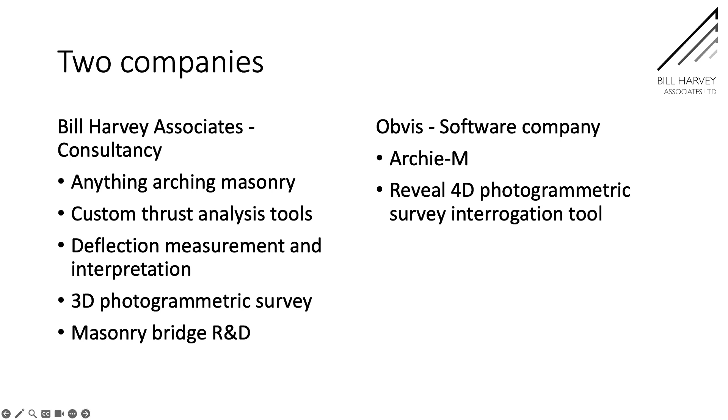Andrew has said that. I just want to say, obviously the audience, I wasn't entirely sure what to expect. I am expecting there to be quite a wide mix. I have explicitly not aimed to teach anything to the established history group, who have quite a good grasp of a lot of this. But I hope there is in the audience some number of engineers working with or interested in masonry, but who aren't familiar with all the background. And that's really the core audience that I'm addressing. And there may be some non-engineers, in which case I hope there's enough non-technical content and photographs and interesting bits and pieces to keep that interest.

Understanding is quite a strong word. Question is, how much do we really understand about bridges, as Andrew was saying? And what does that actually mean? Does it mean we've got tools that let us pour the numbers in and get an answer out? Or does it mean that by some mix of reasoning and calculation, we can achieve the confidence to build, the confidence not to build, the confidence to leave it as it is, the confidence to intervene and decide what to do?

Before we get on to theory, it's sort of obvious, but it's worth saying that an awful lot of bridges were built without anything like modern theory. And true arches, even quite sizable arches, are really very old.

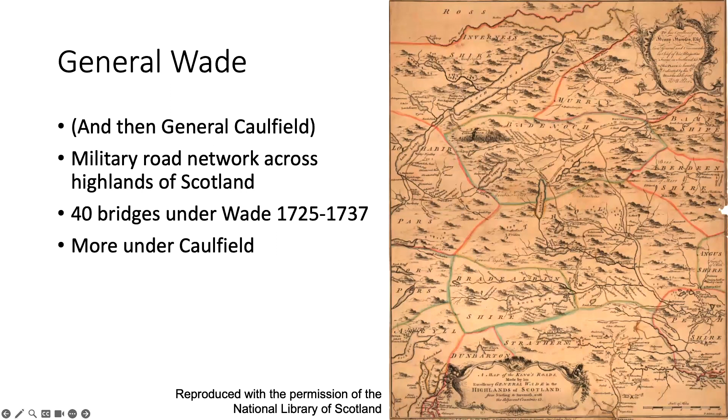Even in the mid-1700s, William Edwards made audacious attempts to cross the River Taff. His first attempt was a 3-span bridge, much like the one behind, or perhaps 3 or 4 spans, no longer known exactly, and it was washed away by a flood. But he'd been given a design, build, finance, operate contract to provide a crossing for 7 years, so he thought, well, sod that, I'm going to cross it in one span.

His first single-span effort, the second attempt overall, saw the centering collapse before the bridge was complete. The centering had been built - I should say Edwards was a country wall builder and house builder - by his friend the wheelwright. It's just a big wheel. That collapsed for reasons we're not entirely sure about, maybe another flood, maybe just inadequate design.

The third attempt, the second single span, saw the centering survive and be struck. The bridge was completed, stayed up for a few weeks, and then failed by the crown bursting upwards. At that point Edwards was bankrupt, unsurprisingly. Fortunately, he was also the local minister, and the gentry had a whip round to put him back on his feet.

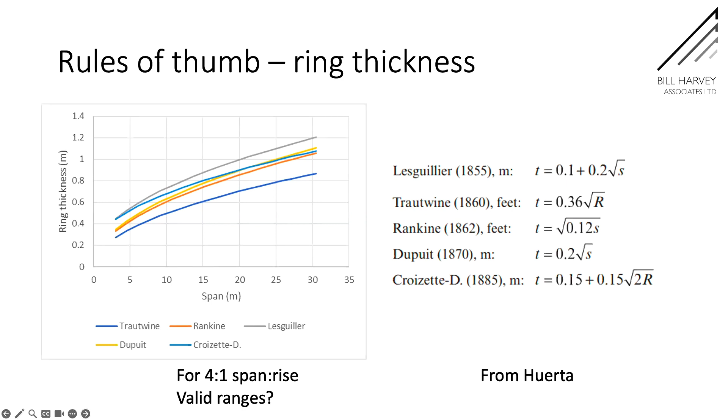That tends to come in more with buttressing for vaults where you don't necessarily have soil behind. So the soil changes things there quite a lot.

Okay, so moving on to the development of theory - it's worth saying I haven't really gone to primary sources very much, partly because French is a language I never learned, and almost all theory happened in France.

I'm drawing heavily on Heyman, who we'll meet later, and Huerta.

In 1717, Gautier identifies 5 significant problems for the learned to resolve. 4 of those are related to masonry bridges. He wants to be able to establish abutment thickness, and pier thickness as a proportion of span for multi-span bridges.

How thick should the ring be at the crown? What shape should the arch be? And also, retaining wall dimensions.

That comes a little bit after Robert Hooke, who famously - and this is the bit almost everyone, I suspect, knows - published at the end of something else entirely, on helioscopes, an anagram with the letters sorted into alphabetical order for a Latin statement, which he claimed showed the true mathematical and mechanical form for all manner of arches for building: as hangs the flexible line, so but inverted stands a rigid arch.

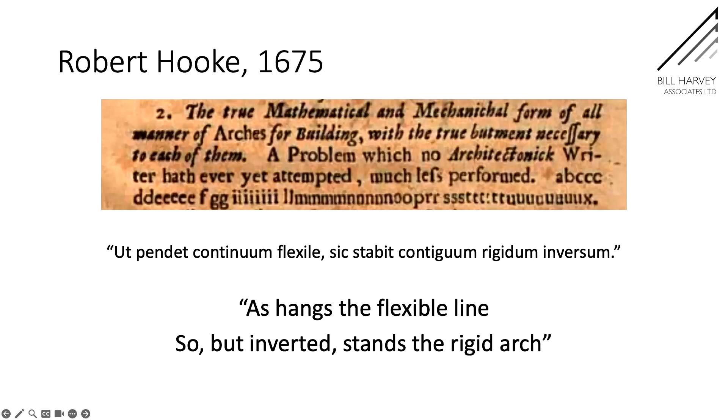That has been taken as a statement that the catenary is the shape of interest. So there's then a bit of pursuit of the mathematics of the catenary.

3 people found a solution, but none of them published a proof - everything was very close, with lots of competition, and people worried about maintaining proof that they'd got there first. In 1697, David Gregory published the whole thing, with some errors apparently, but with a correct result.

He introduces the concept of infinitely small and rigid polished spheres sitting and hanging in an arch. And already in 1697 he makes this statement: when an arch is of any other figure, any other shape than this perfect catenary, it's because in its thickness some catenary is included - a sort of early echo of what turns out to be one of the really fundamental bases of arch stability. So he's recognizing that it will stand if some valid thrust line is present within it.

But how relevant is the catenary really? Hooke didn't actually mention it.

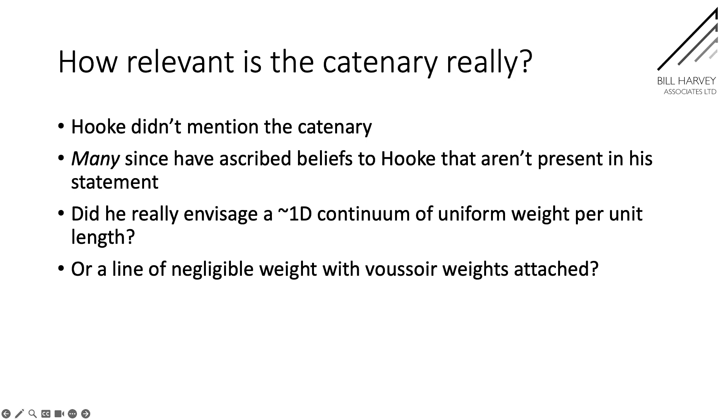Many have ascribed beliefs to Hooke that aren't actually present in that statement. Did he really envisage a 1D continuum with uniform weight per unit length? Or would he have been thinking of a line of negligible weight with heavy weights attached, as ultimately taken to a real extreme in practical application by Gaudi in three dimensions?

Then in 1695, Lahire - apologies for my French pronunciation - who in the process of his work on bridges invented a force polygon and a funicular polygon, which is essentially the line of thrust of an arch. He initially assumed frictionless joints, so zero friction between voussoirs, which means the force has to be exactly perpendicular to the joint at every point in the arch. It also means that if you take your arch right round - if you have a semicircular arch and your springings are horizontal - you obviously have a horizontal force coming through from the arch, so you need an infinite vertical load to stop sliding in the absence of friction.

He came back to it in 1712 and took completely the opposite approach, saying you can assume friction is enough that there will not be any sliding. His object was to find the thrust on the abutment. And this is the first introduction of the idea, in mathematical terms anyway, of the arch breaking at a particular point on the curve.

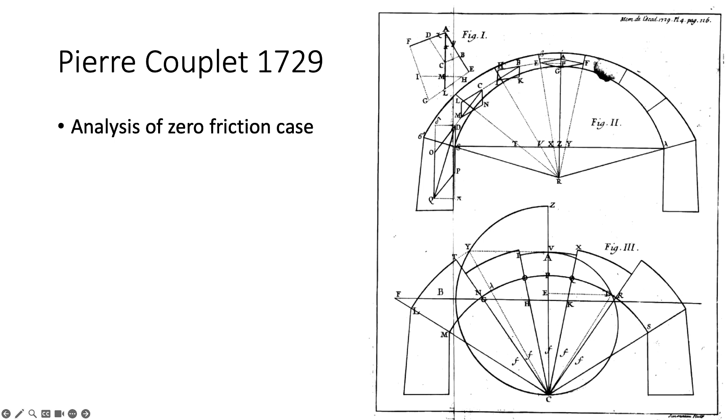And again, he comes back to it a bit later with a different approach. He states his assumptions: friction stops sliding, and there's no resistance to cracks opening, so no tensile stress in the joints. There's also an unstated assumption that the stone won't crush.

One of the things he looks at is the case of a weightless arch with a single central load. And he correctly establishes that it will be stable as long as the straight lines from the load point to the extrados at the springing stay within the masonry.

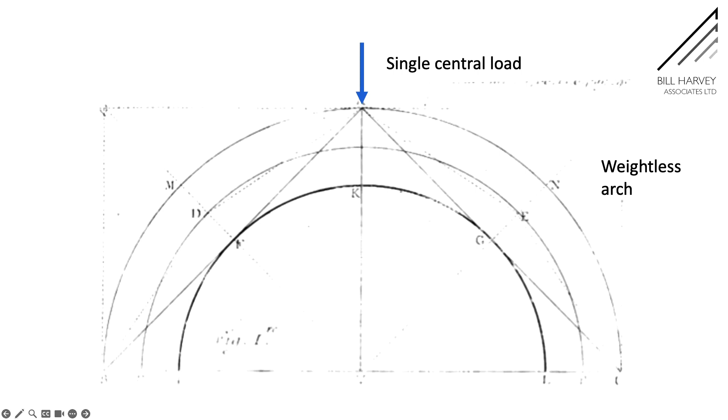He then goes on to look at the minimum thickness for stability under the self-weight of the arch. Here he assumes a hinge at 45 degrees, but correctly works out the maths for the thickness. So the minimum thickness he comes up with is a little bit less than the true minimum, because the true hinge position isn't quite at 45 degrees - but the sensitivity to that position isn't very high, so the error isn't very big.

Then he goes on to look at abutment thrust and stability. Here he assumes that the thrust functions at the midpoint at both the crown and the springing, and we calculate the horizontal thrust.

I'm going to come back in a bit to the whole business of experiments and models, but this particular set are quite important because they influence the development of theory.

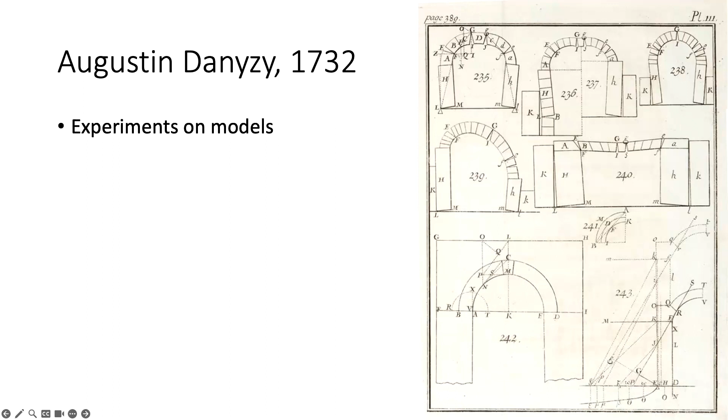He again identified that friction is often large enough to preclude sliding. He assumed that tension in joints can be neglected. And he recognized - this is Couplet's diagram again - that this angle can't be assumed to be 45 degrees; you actually have to search for the worst case.

And he identified that if an arch is stable, then the thrust must lie between some limits, and those limits can be calculated.

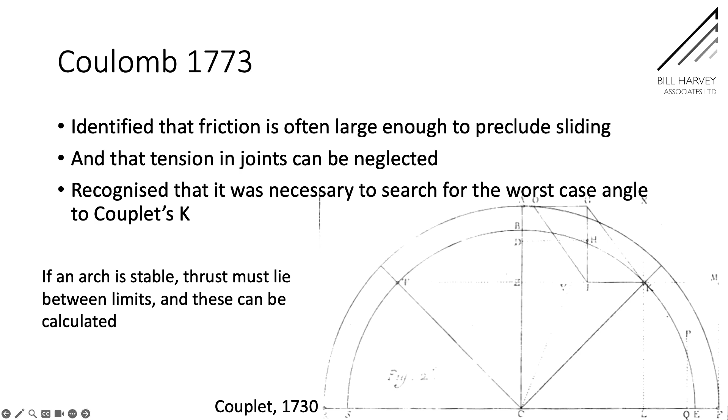I'm jumping now a bit.

Thomas Young wrote an article for the supplement to the Britannica about bridges, and he includes in it the calculation of a line of thrust in the direction of curve of equilibrium for Waterloo Bridge. You note that it follows the center. He's fixing it at the center again at two positions, but it does show that it follows the curve well.

At this point, we start sort of going backwards and forwards. So prior to this, all of that theoretical work was essentially theoretical. Bridges were being built by rules of thumb, trial and error, sometimes physical models. Now we start getting the interesting interaction, and the questions arise of what the particular engineer knew at the point that they were

designing a given bridge. John Rennie, New London Bridge, 150-foot span, how much calculation was involved in this? We don't know the answer to that question.

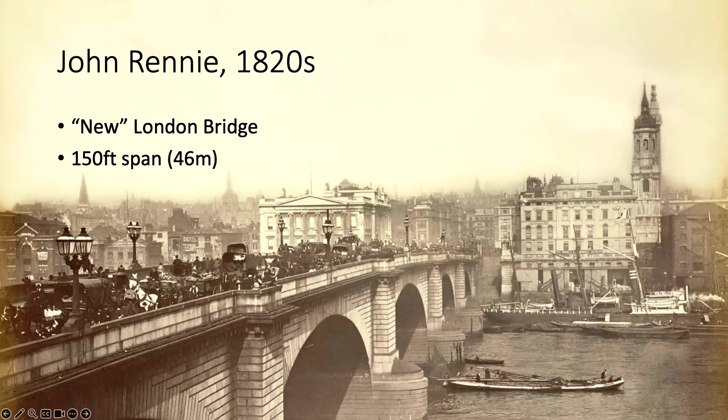Telford's bridge at Over. Telford had a lot of troubles with this, but that was all to do with the fact that the assumptions about the foundation were wrong. He assumed much sounder foundations than were actually present. Again, there's no record that I know of what calculations were done for the stability of the arch itself.

Now we have Navier, whose main contribution is elastic analysis, but in the earlier editions of his teaching, his course notes for the École, covers arch theory. And he inverts what Coulomb said and states the modern understanding that if the thrust lies between the limits, then the arch is stable. So if you can find one line of thrust that fits within the masonry, then the bridge will be safe.

Grosvenor Bridge in Chester, it's George Rennie. His brother, as ICE president in 1846, credited George with doing the analysis for the bridge, equilibrating the bridge, and designing the centering. It's interesting that the latter is contested. The Trubshaw, a dependent of the contractor in building the bridge, presented a paper in which he makes a rather firm claim that the centering was both designed and constructed by his staff.

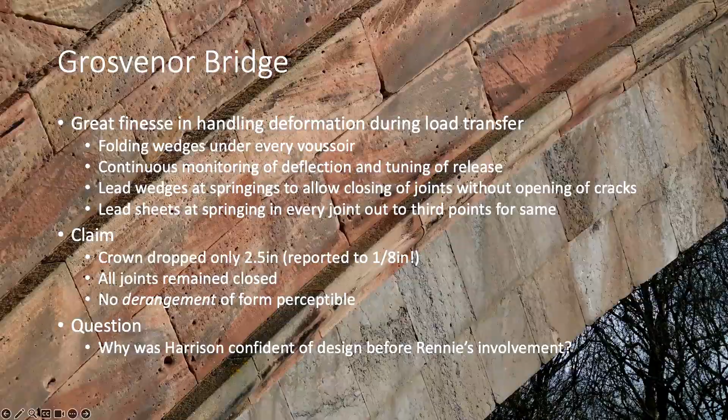So then we get to lines of thrust actually as understood now, which were independently discovered, developed, if you like, by Méry in France and Moseley. It's still known as the méthode de Méry in French. Huerta says that Moseley's was the first precise definition of the line of thrust. I'm not exactly sure what that precision is.

He was one of few British contributors who'd read all of the French work, up to but not including Méry. And he explicitly linked his thrust line with Coulomb's theory of collapse. And he didn't do any experimental work himself, but he referred to lots of work done by others. This period is very interesting because these questions arise of who knows what.

Brunel is very clearly calculating thrust by 1837. There's an interesting bit of subdivision of this mass of masonry over the pier going on. It's not quite clear what's happening there, and the lines drawn connecting two points on the upper part of this block to one point on the bottom don't make any real sense from a thrust point of view. But there's a clear procedure, and there's actually a design procedure visible in his notes about how you get from your starting point to a sound design.

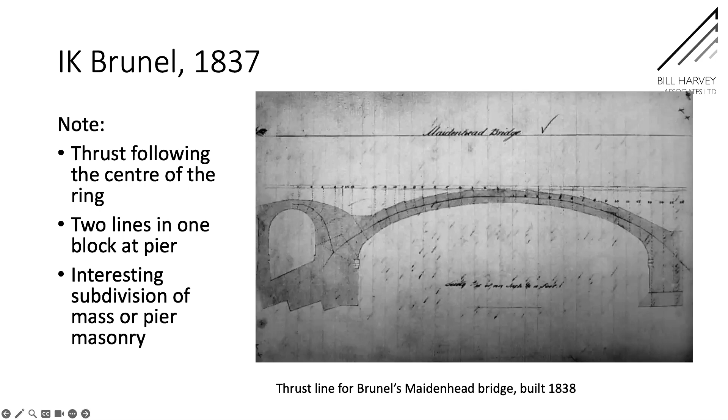And again, Maidenhead had some difficulty, but it wasn't to do with arch stability. It was more likely due to some combination of striking the center before the Roman cement had gone off, and some foundation issues.

There's no indication of his thinking about soil structure interaction and how the thrust and the movement in the foundations works. There's a record from an article by Owen that he instructed his assistant, quite late though, that all forces should pass exactly through the center of any surfaces of resistance, especially in anything resembling a column or strut. Owen suggests that an arch might be seen as resembling a column or strut, which is fair enough, but of course, he wasn't building arch bridges by 1854.

So we've got the state of play in the 1840s. Basic assumptions established: infinite compressive strength, no tensile strength, failure by hinging. We've got a line of thrust, a very mathematical presentation by Moseley, and the implications, exactly what the indeterminacy means. This line of thrust could be in lots of different positions. What are the implications of that? Not necessarily clear, and this is where Barlow comes in.

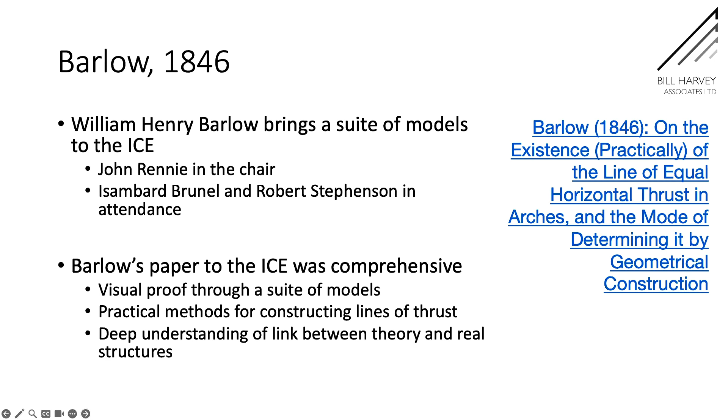And this, interestingly, doesn't particularly feature in Heyman's presentation, but seems to me to be absolutely central. Barlow comes along to the ICE with a suite of physical models. John Rennie's in the chair, Brunel and Stephenson both in the audience. And the paper is comprehensive. So there's a visual proof through a suite of models, practical methods of actually constructing lines of thrust, and a deep understanding of the link between theory and real structures.

Both the paper and the discussion are well worth reading. The discussion is hilarious. Mr. Bidder was tempted to consider an arch constructed of rectangular bricks set in a matrix of cement as a bent truss girder, the tension rods of which were represented by the abutments of the arch. Very flat arches, such as Maidenhead, were examples of what he meant.

Mr. Brunel could not agree with Mr. Bidder's comparison, or what he might be permitted to term his amusing theory. The dripping condescension. Mr. Bidder was right, I think. It's not an unreasonable analogy.

So Barlow has this sort of mostly graphical - there's a bit of calculation and there's the ratio of these lines - but a mostly graphical method for constructing lines of thrust.

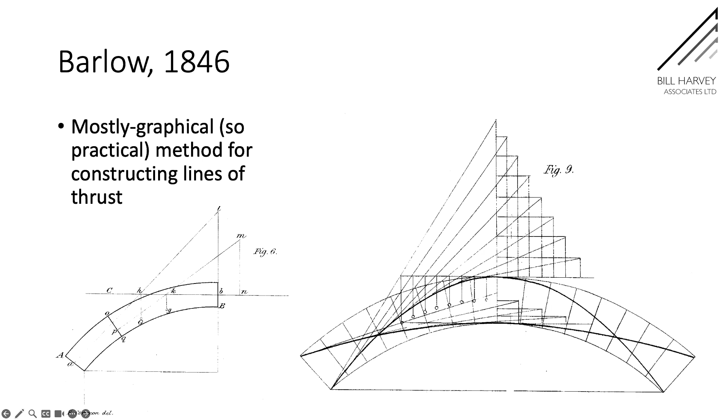But the most significant thing is all the discussion of what it actually means. So he identifies that the maximum horizontal thrust is the resistance that the arch can give if the abutments push, and the minimum is the force that can be exerted by the arch on the abutments. And that's the first time that has really been explicitly drawn out.

He identifies that if you've got arches meeting at a pier, the different geometries, then the relationship between these maximum and minimum are really important. Your minimum at one and the maximum at the other become relevant.

He identifies that just because your masonry is built to a particular springing point doesn't mean that that's the structural springing point. And draws attention to the complexity of real structures in comparison to a 2D arch.

After that, there's multiple rediscoveries, lots of discussion. What becomes known in more recent times as the safe theorem gets into standard text, and people start using it as a routine thing, just accepting that if we can draw a line of thrust within the masonry, then it's sound. And graphic statics, these lines of thrust and the funicular polygon get refined into a much more comprehensive system.

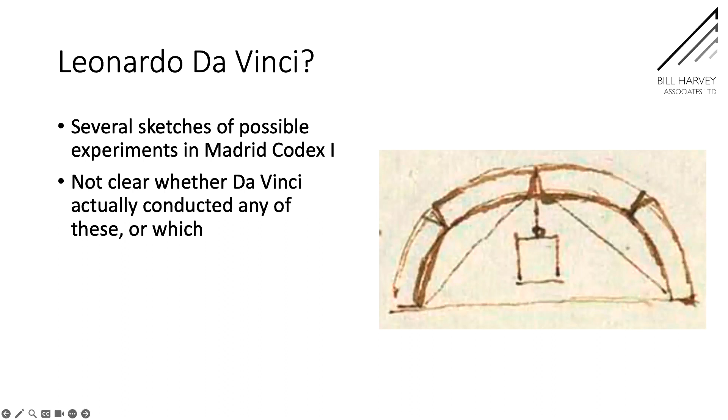We've got the effect of an extra trip load in the collapse mode.

Hooke was an experimentalist. He was curator of experiments for the Royal Society, and there's the documentation of interactions where he was repeatedly promising experiments to prove his theory. Unfortunately, there's no record of the experiments that were done.

I note Bill wrote a New Scientist article many years ago, in which he makes specific claims about what those experiments included. I think he did that. But he was a practicing engineering experimentalist, and he certainly would have been thinking about finite pieces and interactions.

Gautier in 1717 built timber voussoirs in a semicircular arch. He built this half arch setup with blocks on the back and took these off one by one, determining that it collapsed when he got to point 11. If you do the calculations, it should be fine without them at all. So he obviously encountered the problem of physical experiments: if your model isn't perfect, the results aren't either.

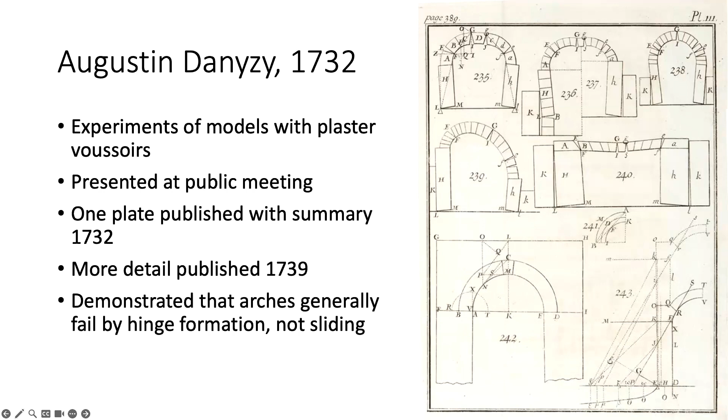There was much concern about the dome of St. Peter's in 1748, and as a result, physical hanging chain models were built as part of the process of proving that it is safe, and also of estimating suitable forces to base the design of a hoop at the bottom on.

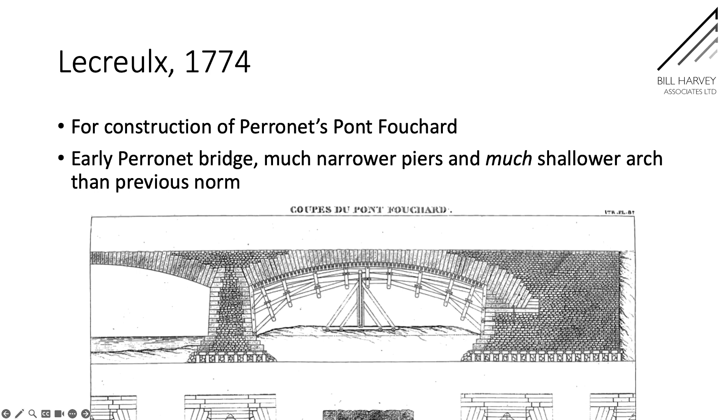In 1774, we've now got Perronet starting to produce very long span, low rise bridges with much higher abutment thrust. His contractor built a series of models for one of his early bridges, and he interestingly identified that sliding failure in the abutment was a real risk for those under dead load.

Another set of experiments in 1810 - there was nothing particularly new in Boistard's experiment, but they were sufficient to convince engineers at that point that the no-friction model was wrong.

Rondelet claims to have made an infinity of experiments using 54 models of vaults of different forms and extrados - probably the largest set that has ever been made and that ever will be made. But he was trying to produce new rules of thumb. So he was doing experiments, producing data, and then trying to fit a new rule of thumb to it - the old approach, just based on his experiments rather than on observation of previous successes.

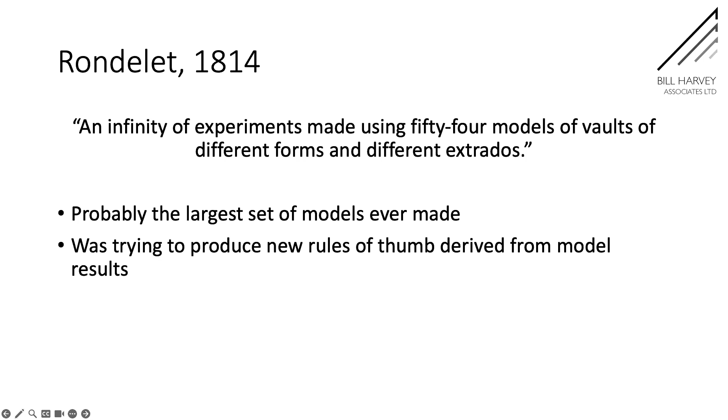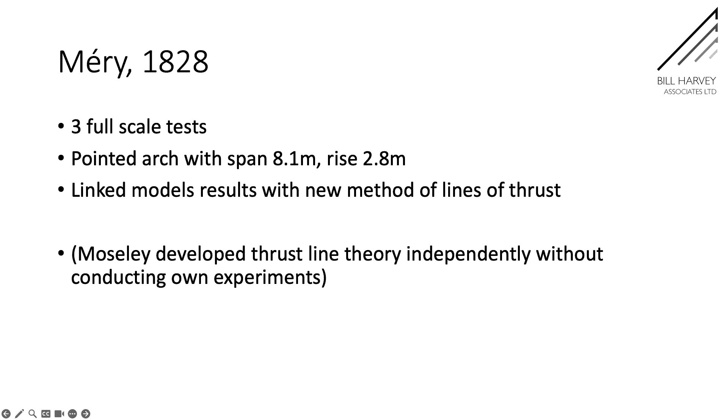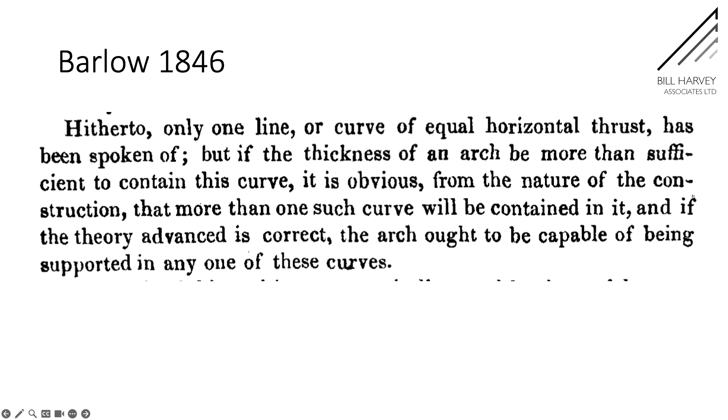He did his own experiments as well, quite large span. And Barlow, of course, the whole thing about Barlow's paper was that it involved all these physical models. So he introduced the wobbly arch, which becomes a stock in trade of the educator, beautifully showing how, as you load the top, although the arch goes down, it goes up - that interaction between thrust and deflection. Just as an aside, Fleeming Jenkin illustrates in his article models very much on the same basis.

But the key observation is this model: 6 voussoirs with wooden slips between, each with 4 pieces of timber. So you can take them out in any combination and show one by one that the different thrust lines all work.

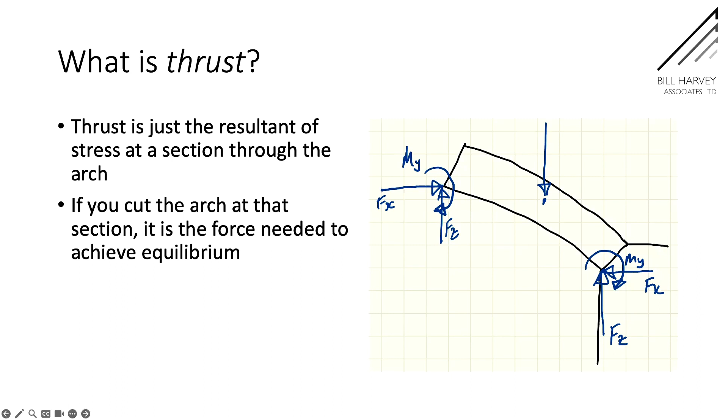Quick technical bit, just in case it's not familiar. Thrust itself is just the resultant of stress at some slice through the arch - the force you need to maintain equilibrium if you cut the arch there. If you rotate the axes of these forces so that they're normal and parallel to the cut, then you've got a shear working along - and this is the thing that we're saying will never be enough to induce sliding - and we've got a normal force. Divide the moment by the normal force and you get an offset, which is where that resultant acts. Thrust is simply the locus of points as you do that for every section, for lots of sections around the arch.

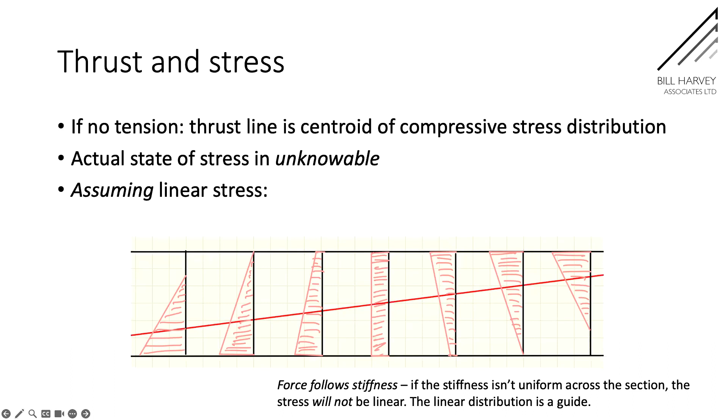Relating to stress, if there's no tension, then the thrust is the centroid of a compressive stress distribution. The actual stress is unknowable, but if you assume linear stress, it gives you some idea of what's going on. This picture at the bottom shows a line of thrust running from outside the third point at one side to outside the third point at the other, and you can see how the stress varies. Where the stress goes to zero, a crack opens. If the stress balances, then they close again.

If that line of thrust gets to the very edge, it means the stress is infinite. So if the line of thrust is at or beyond the edge, that's an impossible state.

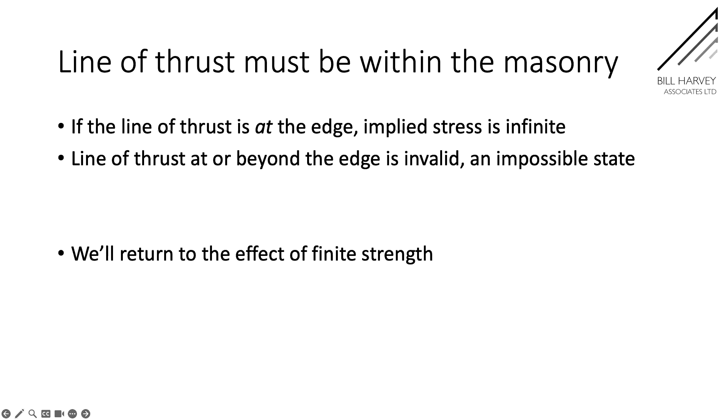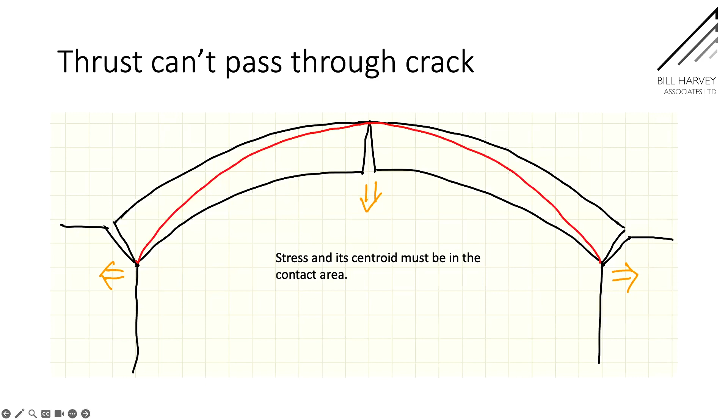If the abutments push in, the arch will squeeze up, and again the thrust has to go through the points of contact, so it has to be much flatter. Those are exactly Barlow's limiting lines.

Is that a meaningful state? Sure. Both abutments tilt the same way—that's exactly what you get.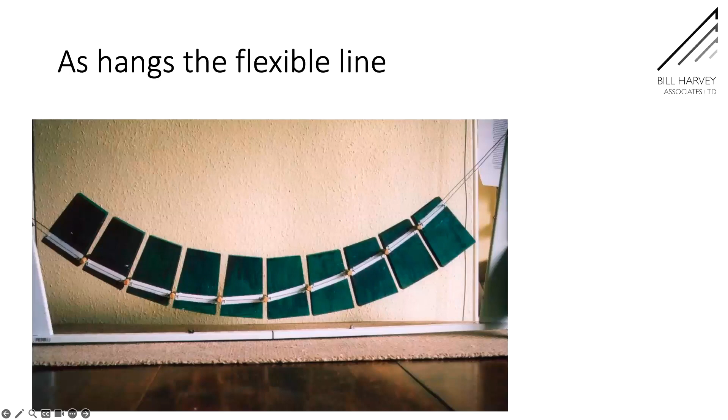And that model has a pair showing Hooke's observation. It works perfectly well, and even in this—this is an inverted photo of a suspended form. The voussoirs take up the right angle.

So the calculation is easy if we have three hinges—it's all simple statics. In two cases, your vertical offset is lower, your horizontal offset is bigger, so the horizontal component of thrust increases.

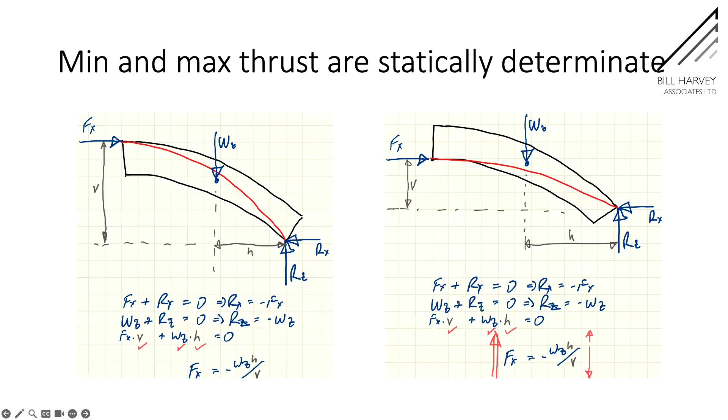In between, we've got no way of knowing where the thrust acts on the crown and springing in a particular case. But if we choose values for the unknowns, we can calculate the implied thrust from that. That's exactly what Young was doing—they were saying we're going to fix the thrust at the crown in the middle, and somewhere down here in the middle, and try to find a form for the bridge which keeps it near the middle through the whole thing. Brunel was doing it as a design; Young was doing it as a test of an existing bridge.

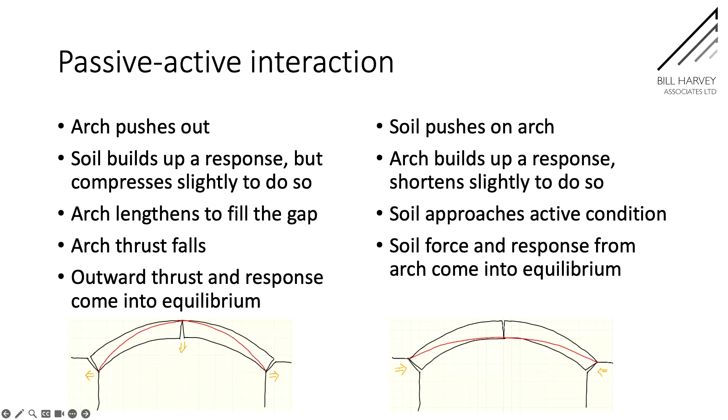In terms of understanding how arches behave in situ, the passive-active interaction is really absolutely fundamental. The arch has a passive-active behavior in the same way as the soil. If you push on soil, it pushes back harder; if you move away, it pushes less hard. The arch does the opposite, and so they can find equilibrium. But they have to find equilibrium, and finding it involves movement—small movements, but significant movements.

If you find that the minimum and maximum don't work out together—if the minimum arch thrust is greater than the maximum available soil pressure, the arch will keep dropping. It's not particularly common, but it does happen. And if the minimum soil pressure is greater than the maximum arch thrust, then the arch will burst upwards. That, again, is rare, but it does happen.

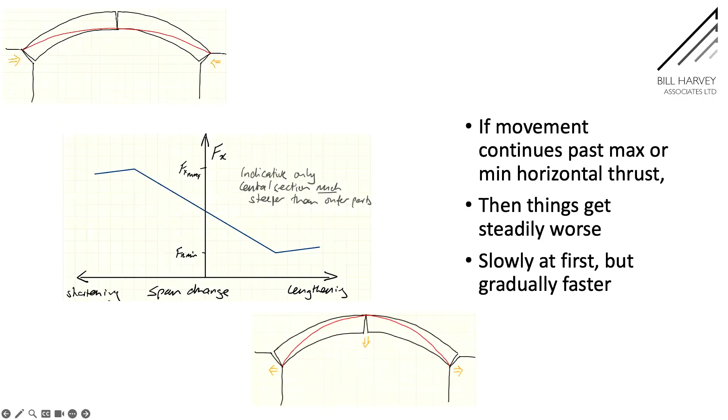I'll skip through those.

The medieval tradition had been that the mason's secrets were rules of proportion—thickness of abutment relative to the span of the arch, and things like that. They were expected to work at any scale: you can build a model this big, or a cathedral, and the same rules work. Strength of material just doesn't feature. And interestingly, arch theory, as developed through to Culmann and Barlow, also doesn't mention that theory.

Galileo challenged that, laid the foundation for strength of materials, introduced the square-cube law, and observed that if you double the length, your weight has gone up with the cube, but the available capacity has only gone up with the square.

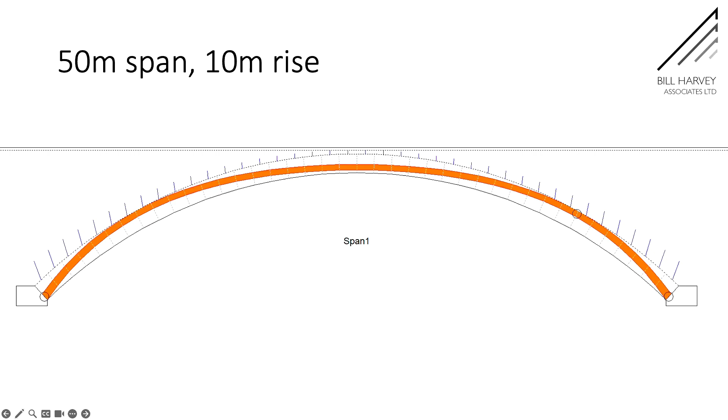Just looking at some pictures from our Archie software, doubling every dimension as we go, but not the material. The thickness of this line shows how much material is needed to sustain the load, and you can see that thickness increasing. The general shape of the thrust isn't changing much, but as we double and double and double, eventually it doesn't fit at all.

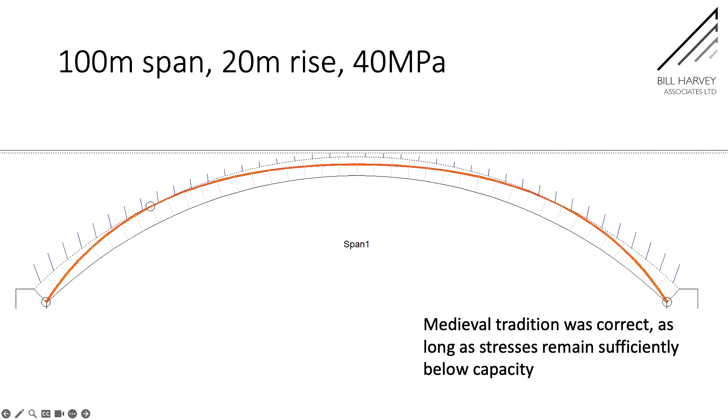You're unlikely to build a 100-meter span bridge with a 5 megapascal brick. If we double the strength as well, then you can really see there's absolutely no change in the form of the thrust. So as long as we are a long way from capacity, the medieval rules work fine.

They introduced the ability to resolve indeterminacy by introducing elastic properties. He defined the job of the structural engineer as calculating unique internal forces, deriving the internal stresses, and comparing those with material strength, which Heyman soon called Navier's straitjacket.

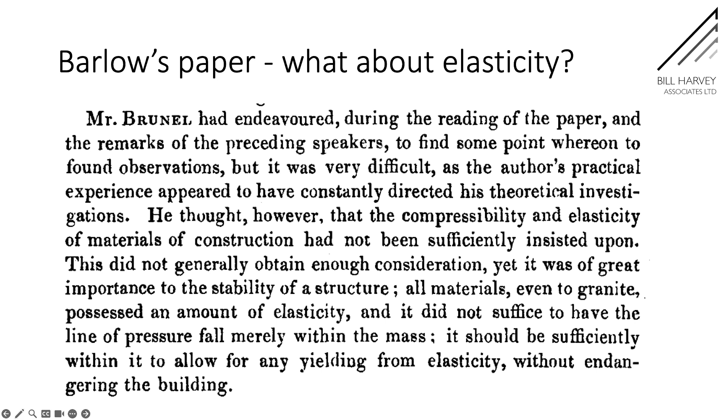Barlow's paper: Brunel in the discussion asked about elasticity. He said this is important, I didn't see you mention it. Brunel said he'd endeavoured to find points to pick, but it's difficult because his practical experience is too great. Barlow said yes, that is an issue, but we deal with it by keeping the thrust well away from the edge. There's no suggestion we should analyze the elasticity, we just accept that the crown will drop and allow for that.

There's a lot in more recent work. The middle third rule comes up, where we try to keep the thrust within the middle third. That implies the arch could stand without cracks opening if the thrust stayed in the middle third, but just because it could doesn't mean it will. As soon as the thrust goes outside that, cracks start opening. It's a very conservative rule.

What happened after Barlow? Finally we had a pretty complete understanding, but we stopped building big masonry bridges. They carried on in France and Germany, and China carried on right through into the current century.

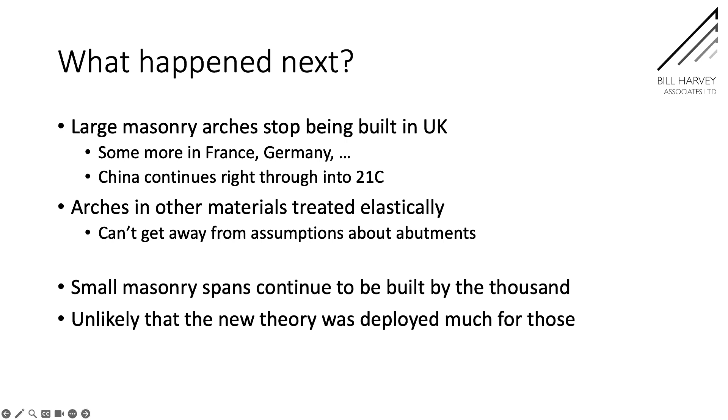Other types of arch bridges, non-masonry, were treated elastically. But you still can't get away from the impact of the assumptions you make about abutments, even if you have a material that can sustain tension. And small masonry spans continue to be built by the thousand without any use of theory.

The experiments continue. In 1895 the Austrians set out to prove the validity of the elastic approach, building enormous models, 23 meter span, in brick and stone, mass concrete, reinforced concrete, and steel. But they set out with the specific aim of proving elastic theory, and even when their data showed the behavior had gone beyond elastic, that was ignored.

In 1919 Castigliano comes along with an economical method of solving the elastic problem, and also shows a way of analyzing masonry bridges: if we have a masonry arch, we do one elastic analysis where it shows tension, we take that material out, keep the weight, but don't allow for the material in the analysis, and we iterate, quickly converging on a solution. But all of that work gives you stresses for particular foundation behavior, as presented for rigid foundations, which isn't what you'd tend to find.

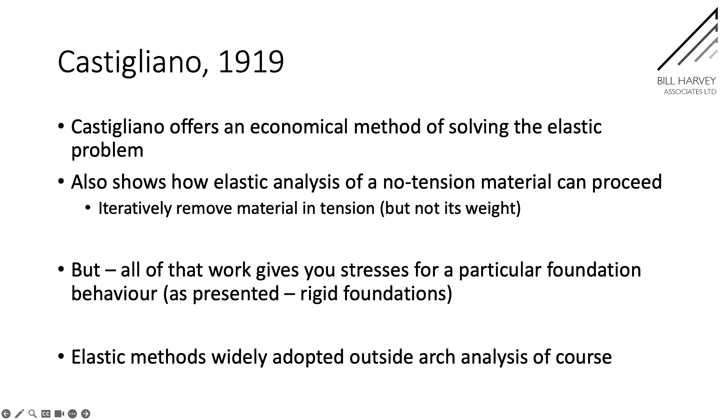But nonetheless, the elastic methods were very widely adopted outside arch analysis.

And now we've got the question of live load. In 1876 Fleeming Jenkin, in his Britannica article, says the masonry arch differs from the superstructure of other bridges in that its dead load is so much that we can ignore live loads. That's the new London Bridge - you can see that live load is just not going to have any effect on the bridge at all.

That starts to change in the 20s and 30s, and particularly with the onset of war, where you've got tanks and tank transporters being moved around. The rail situation is a bit less obvious, because locomotives get heavier sooner.

Pippard then takes this question up, and the assessment of existing bridges for heavy loads becomes a thing. Pippard starts with another round of model experiments and develops an assessment method, though his experiments don't add a lot, really.

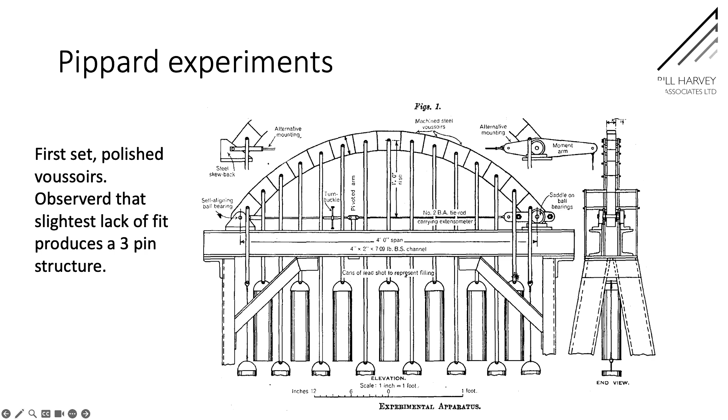His first set used polished, very finely machined voussoirs, and one observation was that any lack of fit in your structure reduces it to a three-pinned structure. He did another set then with concrete voussoirs and mortar.

Pippard was convinced that elastic analysis was the way to go, but he didn't have digital computers, only human ones, and elastic analysis of each individual bridge was even less viable than the graphic statics approach. So he sought to simplify it into something akin to a rule of thumb - that doesn't really generate any understanding, it's just a tool for deciding whether a bridge passes or not.

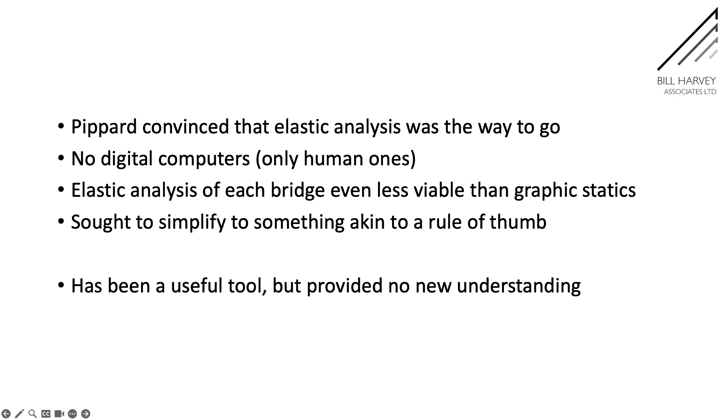That was further refined or modified by the Military Engineering Experimental Establishment in and post-war into the MEXE method, which is still used.

There's a simple formula in terms of the span and the total height, including the ring thickness and fill at the top, for a provisional axle load, and then a series of factors that reduce it. That's for a parabolic arch. So you have a factor for shape and various factors for condition.

And to make that even quicker, it was presented as a nomogram. So you've got the arch span and the total thickness, and you can draw a line through to get your provisional axle load, which is a lovely thing. Your military assessor could come along and read off the value in no time at all.

But it didn't do everything, and graphic statics was still in use.

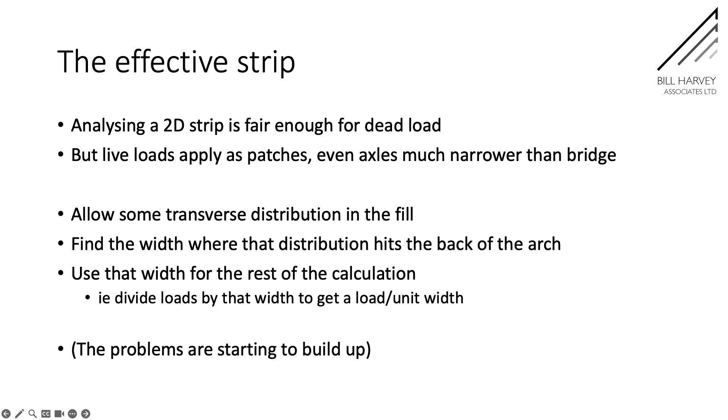When you're putting loads on bridges, it gets complicated. If you're just thinking about dead load, you can take a 2D strip, and that's fine. As soon as you start putting a load on top, you've got patch loads in different places, and it gets really complicated. A skew bridge is even more complicated because they don't behave the same.

So we have to introduce rules about how things go. According to the British rules now, loads distribute differently on road and rail bridges. And there's no distribution in the masonry at all, so once the load gets into the masonry, it's stuck.

In the 1930s, a young Jacques Heyman is working with Baker in Cambridge. It's found that measuring stresses on site in new steel buildings, the results don't bear any resemblance to the stresses calculated by the designers, which is obviously quite alarming.

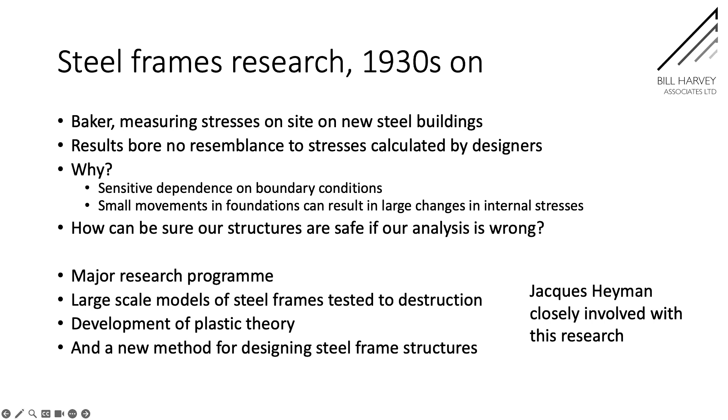How do we know that our structure is safe if our analysis is wrong? So there's a big research program, very large scale models of steel frames tested to destruction. And that results in plastic theory and a new method for designing frames.

And the core of that is this, which Heyman always presents in anthropomorphic terms, as if you can find a way for the structure to stand up, then it can find one too. The way it finds is probably not going to be the same as yours.

And that was then applied to masonry rather later. Heyman is always very careful to credit the initial insight to someone else, but it was Heyman who did all the word spreading, did the developing, did the marketing, providing a theoretical basis to what Barlow had already presented and what many by that time had accepted intuitively.

But plastic theory requires ductility, and masonry is a brittle material. And yet masonry structures are ductile—they can tolerate large deformations without collapse.

In bending, by squeezing that mortar at the corner. The assumptions for plastic theory are exactly the assumptions that Culmann identified.

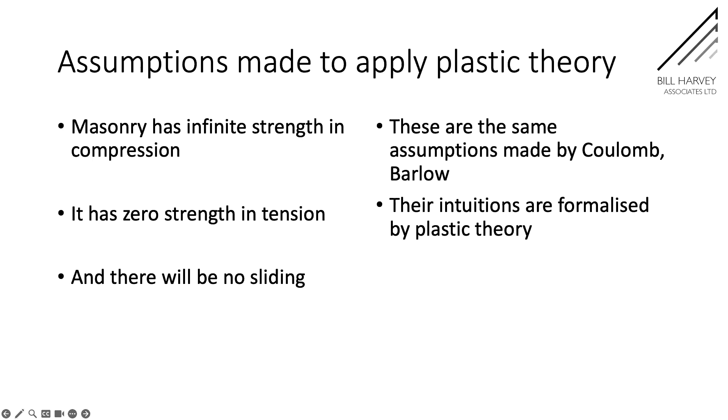Heyman produced from that a way of assessing masonry bridges, but with no computers involved—it involved drawing. It worked with a single axle load at the crown. And you have to deal with the fact that the load is narrower than the bridge, and he followed Pippard with an effective strip.

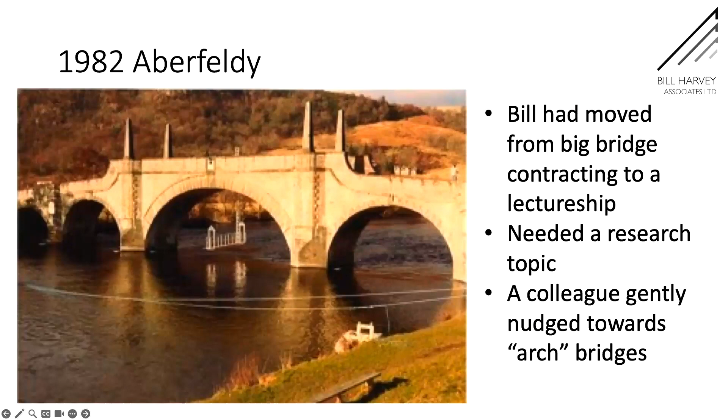And Bill had just started as a lecturer, having spent an early career building big steel bridges, needed a research topic, and Alan Vardy nudged him in the direction of arch bridges. And he saw pretty quickly that taking Heyman's approach and putting it onto a computer would be very powerful.

So the first iteration was on a programmable calculator. It would just give you a question mark, and you would type in hinge positions using indexes of the positions around the ring, and it would spit out a thrust and whether a horizontal component of thrust fitted. The next version was on an NCR Decision Mate.

It didn't come with the person who was always there on the adverts at that time.

He demonstrated it—it was supposed to be a research presentation meeting. The Northern Ireland Department of Transport said, we need it now. How much do you want?

And in various editions, it has been in continuous use for 40 years or so, or nearly 40 years. And the two big innovations there: one is this automatic search for a viable thrust, calculate and display, which means the engineer can interact and see what the behavior means.

And it took maybe 3 seconds to calculate one case on 1984 hardware. It's instant now. But also the zone of thrust—the zone of thrust deals with this business of finite strength.

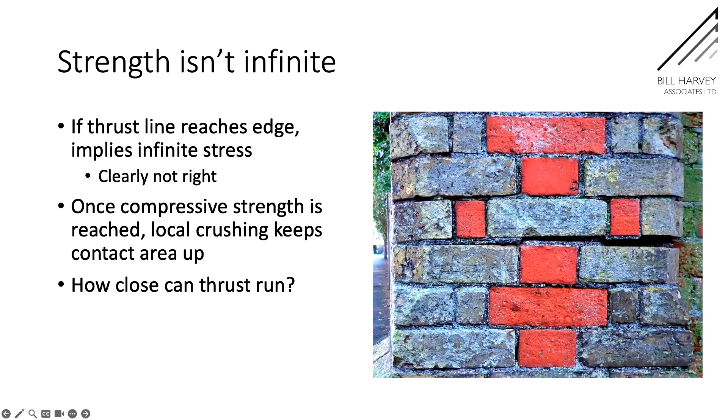Rather than a middle third or middle half, we say if we have a material strength, then we know that as we get towards the edge, this will start to flatten, and the limiting case is a uniform stress at the edge, at material strength. We get local crushing, so the area always increases to be just enough to carry the load. That tells us how close the thrust can be, and because we can do the calculation at each section, we can tune that so we never let the thrust get too close to the edge. And that's the zone that Archie draws in this.

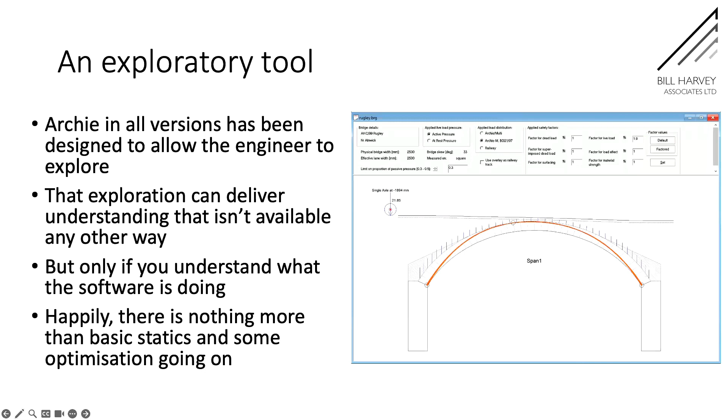The thing about Archie is it's supposed to be exploratory, so you can interact with it and see the implications of what you're doing. So here, for example, we can say we're not going to allow the thrust to go within, so say we've got lots of loss of mortar. We can just drag it up and see how that affects thrust as we go.

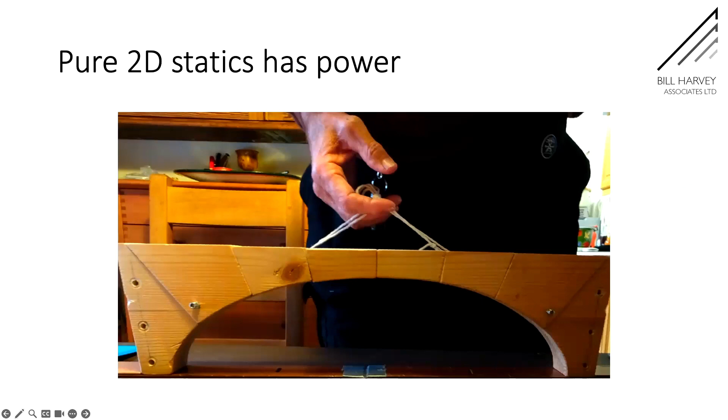Pure 2D statics has real power. It allows you to demonstrate to people who really don't believe it's possible, for example, that you can cut a bridge out of its abutments and jack it a meter up into the air and then fill in the gap. But even in 2D, there are real complications. And when masonry starts to get thick, things get weird.

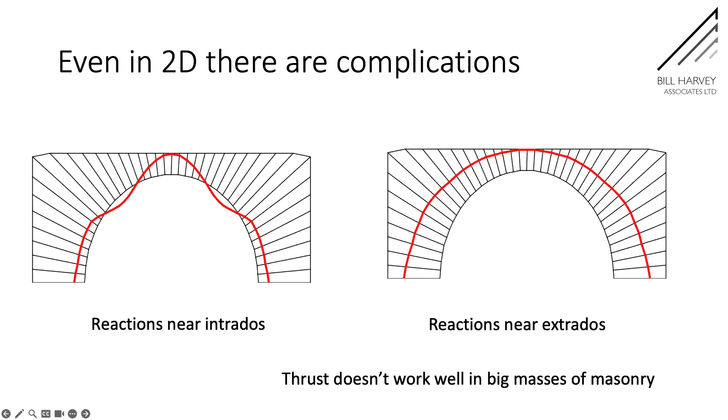And once you get outside 2D, bridges get really, really complex. Materials have unknown properties, genuinely unknown properties that vary enormously in order of magnitude, in time and space, if they get wet. Across the bridge, the internal masonry is typically much less strong, much less stiff than the skin.

Our distribution business, once that load gets into the ring, clearly it continues to distribute in just the way we're perfectly happy to say that if you put a load at the top of a wall, it doesn't go straight down and appear as a patch load at the same size at the bottom. That straight down behavior is what our rules of distribution say.

And then viaducts. So Archie customers, as soon as they got Archie, said, what about multiple spans? And Bill went to Barlow and this interaction, the passive active interaction of spans, and implemented that in multi, which is now part of Archie.

But observation of actual behavior makes it clear that's not the whole story. If you look how far from the springing, this is London Road in Brighton. The bomb took out one span, so two spans, one pier. But there's a huge amount of masonry up from the springing still in situ.

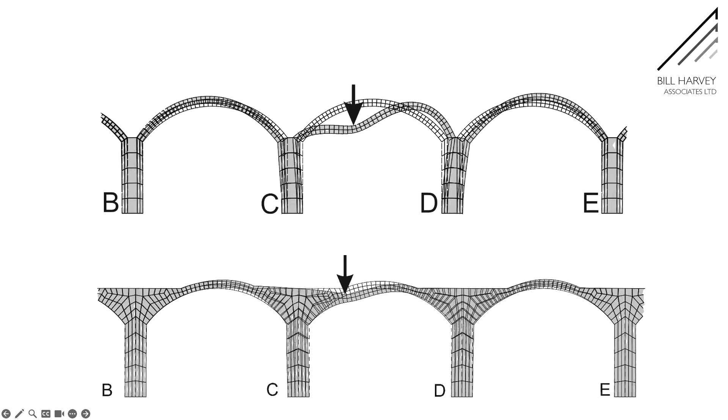Simple elastic model, no backing and with backing, shows just how profoundly that behavior changes. And that has, once you add the 3D components, the spandrel wall and parapet on top, massive effects. Cracks start to open and close. Mud pumps out from the fill. You get crushing at the centers of rotation. You get all these kinds of behaviors.

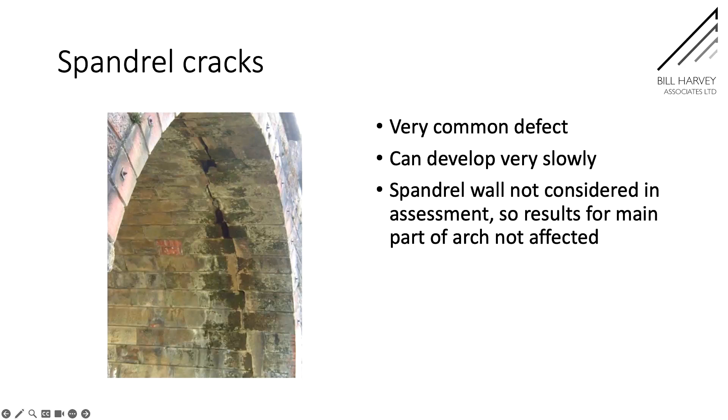Horizontal cracks across the ridge. Spandrel cracks are a very common defect. They can develop very slowly, but we tend to say the spandrel wall is not considered in assessment. That's fine, because it can only help. And if we break it off, that means our assessment isn't going to suddenly be wrong.

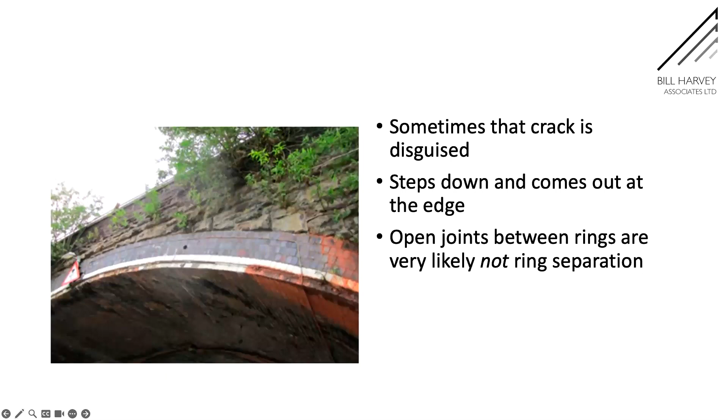Does that mean we need complex 3D models? For assessment, really no. There are neither the resources nor the required input. The resource issue will no doubt get easier over time.

What we can do now compared to what was possible with finite element analysis when Bill got started is night and day. But the data issue will never go away. We simply cannot have the data that would justify building a model like that of a particular bridge for an assessment.

We need engineering models that are actually diagnostic, more like thrust models than like 3D FE.

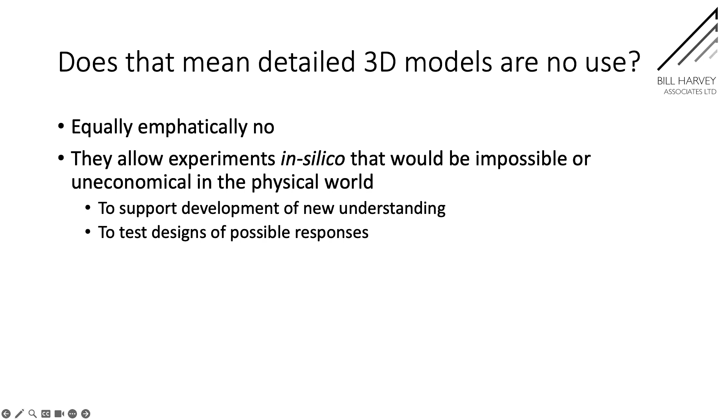Does that mean that detailed 3D models are no use? Equally emphatically, no. They allow experiments, in silico experiments, on hypothetical structures that would be uneconomical in the physical world, either to support the development of new understanding or to test designs of possible responses.

The stability of masonry arches, a 2D problem, has been fully understood for a long time. But it had to be rediscovered repeatedly. It was forgotten at the start of the 20th century. Heyman brought it back in with a solid theoretical foundation. Bill Harvey obviously brought that into widespread use for assessment.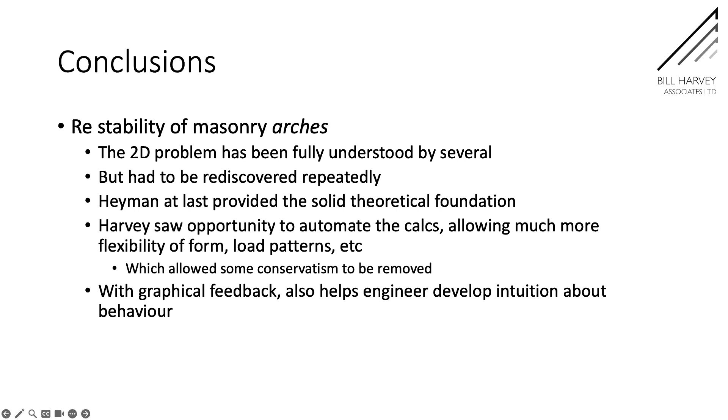One of the interesting things from my experience is that the interaction of interactivity with thrust allows you to develop an intuition about behavior if you understand what the computer is doing and can interact with it.

But regarding the capacity of masonry bridges, it's a different and much more difficult problem. Zone of thrust is good enough for ultimate load tests. Safety against collapse, though, is very rarely the main concern. There's lots of conservatism in typical assessment. You usually run away from any kind of risk of collapse.

But a bridge can be at no risk of collapse and yet suffer serious cumulative damage. Real masonry bridges are doing that all the time. The actual stresses are unknowable. So we can't just do some sort of complex analysis and get an answer. And there's still a vast amount to learn.

Always welcome challenges, questions, interactions. And for those that don't already know, I haven't quite kept up with it monthly since Bill died, but I'm trying to keep up Bill's Bridge of the Month newsletter.

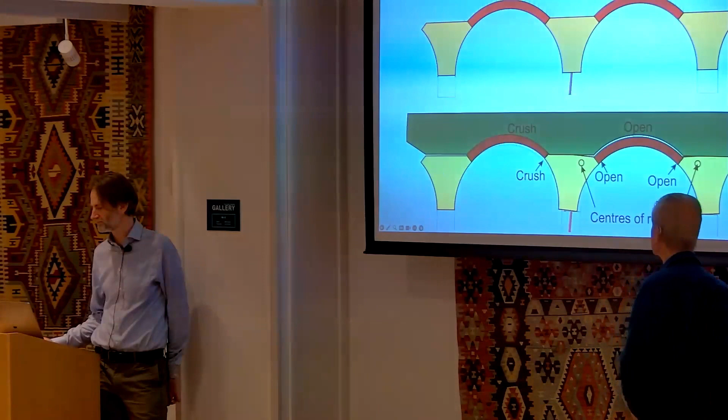And you had a photo of a railway viaduct with the span collapsed because of an explosion? Just above the piers, it looked as if there were like diaphragm walls. Is that common for viaducts? What's the reason, especially when your dead load is so large that the live load is almost insignificant - what's the reason for having voids like that?

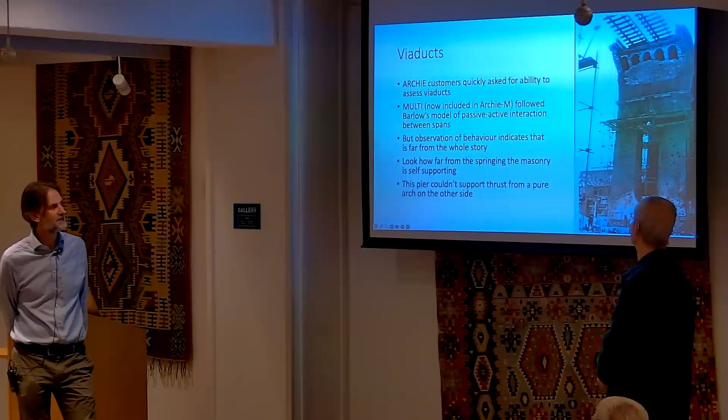At the time these were built, it wouldn't have changed the fact that the dead load was still significant relative to the live loads of the time. It's not obvious in that picture whether that was the case, but they were typically directly under the rails as built, so you're putting the load straight onto the wall. There would be solid backing for part of the width, and then walls with stable material. What the whole rationale is, I'm not sure, but it's very common, and it's not even entirely restricted to viaducts - they appear in single span bridges as well. You get cellular abutments, all sorts of things going on for certain designers.

One of the other things Bill has been advocating for a long time is that we need a serious survey of the railway network by contractor and designer, so you can establish what to expect on any particular structure, even if you can't get a drawing, which you often can't. So you can say, I want to know about this bridge, and it'll spread out and say, what can we find that was designed by the same person, built by the same contractor? Because that will tell us what to expect. There are classic cases of people finding a void in a bridge, terrible excitement, and filling it with concrete.

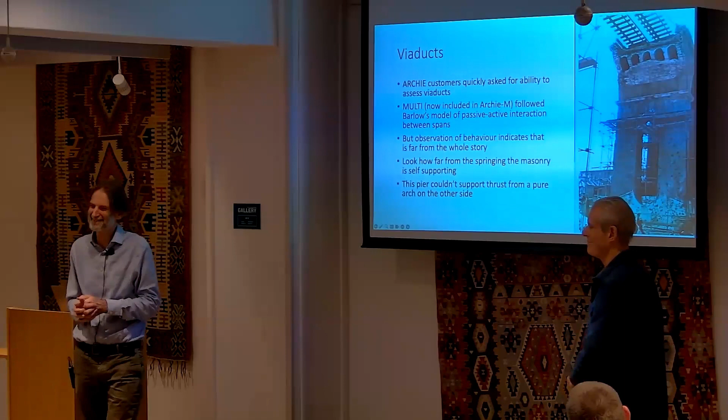And the fact that it's on a bridge, nobody stops to think about. Where's he going? Yeah.

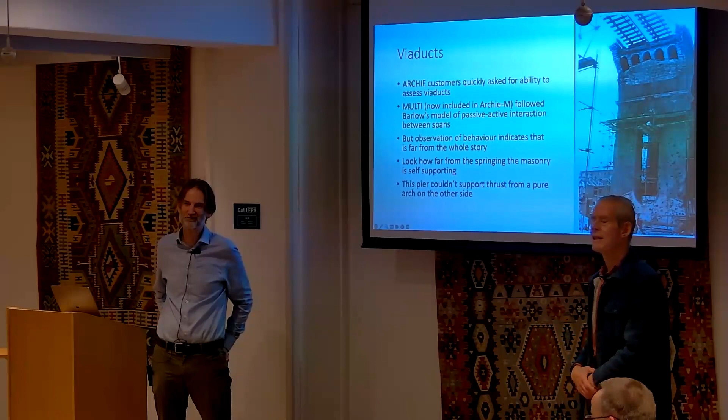David, I'm one of those people present who's not an engineer, so I want to thank you for explaining that so well to us who know a bit about engineering, but not all the terms. I want to go off to one side a little bit. I'm an architect and I look at cathedrals and all kinds of buildings. I'm wondering what your work can tell me about flying buttresses, which are sort of half arches.

So, Heyman's work - there was quite a lot on flying buttresses, and they are, in a sense, less complex than masonry bridges. They tend to fit the model better in some ways. There are complications as ever, but it's a technique that's been used many times over many decades, hundreds of years, even to both post-Heyman with the explicit understanding of theoretical foundation and before - tracing thrust through abutments and showing that they provide the necessary support for the main vault. It's definitely a thing. It gets interesting.

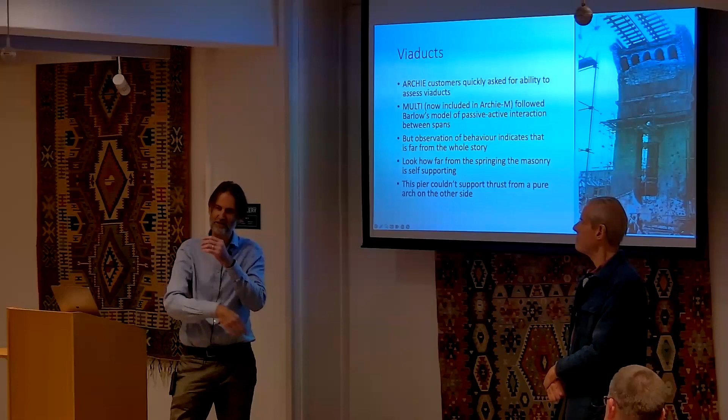The model that Bill built - something I would really like to get back to doing - is 3D thrust calculation using horizontal slices. So just taking slices in each section, tracing thrust down through that, seeing how it tracks in both directions, to see where it lands. So there are all sorts of interesting things which can be done.

I think part of the answer about flying buttresses is that the dead load - well, the imposed load, which is mostly wind load - is generally relatively small compared to the self weight. So if you can establish a stable buttress, it'll probably stay stable. But also, because of their proportion of height to base width, the problem with foundation stability and foundation rotation is quite serious. I can't remember - is it Beauvais, which collapsed a few years after construction? I think Jacques' theory was that was because of foundation movement. I can't remember, don't have it to hand. As you and I have both seen, when you build a buttress against a wall to stop it tilting, very often the buttress then tilts further than the wall because you haven't sorted out its foundations and connected it properly to the wall.

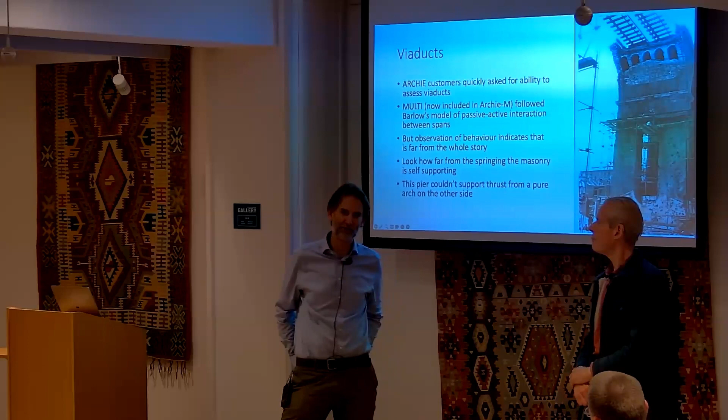Yeah, and they're just accelerations, so you can include the load that results from that acceleration and look at it. It's not something I've done, it's not something that's been demanded here. Clearly it's interesting - there are other things that need to come into the arch stuff in particular, like buoyancy from flood, it raises interesting questions. So other sources of load and seismic loads essentially just come under that category. You can introduce those loads and see what effect it has on thrust, see whether it can still support it, whether you can - the truly dynamic effects when they start rattling backwards and forwards get more complicated. So you can show what acceleration will induce collapse.

So is the Italian experience that on the whole arch bridges survive earthquakes fairly well? It seems that the new bridges, they fail, but the historical arch bridges, they're still there. So it seems the conservation of the arch bridges, they do much better than the new construction. One of those bridges of the month some time ago was a little tour of Christchurch after the earthquake - the bridges are out there and there was serious damage, but you often end up with a situation where the bridge is clearly quite compromised, but still standing.

In the same way as when a pier of a viaduct goes down by 100 millimeters, like the picture I showed, the permanent way people come along, fill in the hole, and the railway carries on running.

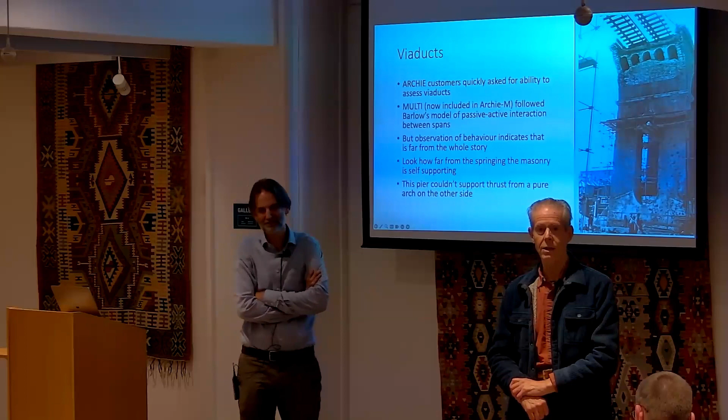My limited observation from another earthquake zone in Jamaica is that if the earthquake results in bodily shaking of the masonry arch, it has a really quite good chance of survival. But if one side moves horizontally relative to the other and the span pulls apart, there's a chance they will collapse, and the damage is then much more severe.

Patrick Palmer, retired. I was with Professor Heyman when we had a structural visit to Lancing College Chapel, which has flying buttresses, and we observed a shear failure between the flying buttress and the vertical wall it was propping. Coincidentally, we discovered that the person who built that chapel wanted to have a go at the brickwork himself, and that was the joint he did, and he hadn't put in the shear key. It just looked okay from a masonry point of view, it looked like a complete thing, but he obviously hadn't made the bricks go through into the wall.

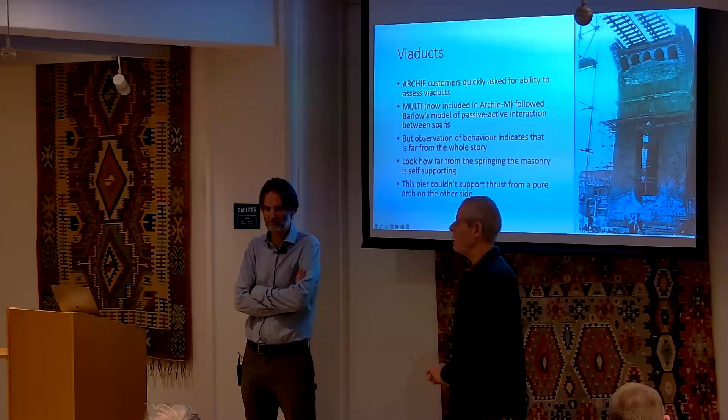I see, so it had actually sheared on the vertical joint. So most people talking about flying buttresses concentrate on the two-dimensional effect of the vertical loads and where the line of thrust is. But it showed me that those flying buttresses also have a role in wind load, even though it's a relatively small proportion. The joint was badly made and it showed up in that storm of, what was it, '57 or something. By the time you get to some of the more extreme Gothic cathedrals, particularly in Germany, with those very tall pitched roofs, the wind loads aren't necessarily that small compared to the self-weight, so there's obviously a limit to how far you can go. But my impression is that certainly for earlier churches, the assumption that wind loads aren't going to cause a critical state seems to be okay.

Can I just add to the picture there, Brighton? It was originally constructed with lime mortar. When they replaced the viaduct, they used Portland cement mortar, and the people in Argyle Road, which you can just see at the bottom there, complained about the excessive noise. Well, I wouldn't mind betting there are some quite sizable cracks between the bits rebuilt with cement mortar and the earlier bits with lime - completely incompatible.

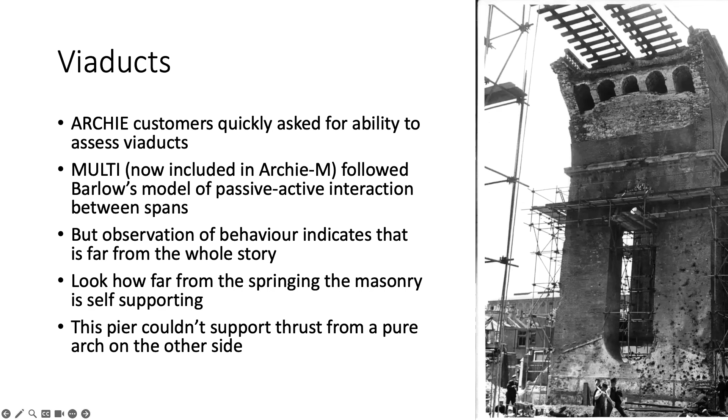One of the really interesting observations there is the fact that it's still standing. There is a substantial crack on the far side of that pier, so it has moved. It's probably relying on the tension in the track to provide just enough to keep it there. I remember somebody doing an analysis - it's slightly complicated by the fact that at that point the railway is curved in plan. You can see the rest of it going on around there, can't you?

Okay, and what's the question please? It might be a bit of a general question, but what sort of repair methods, when you see cracks in bridges, would you recommend, and which ones you wouldn't recommend?

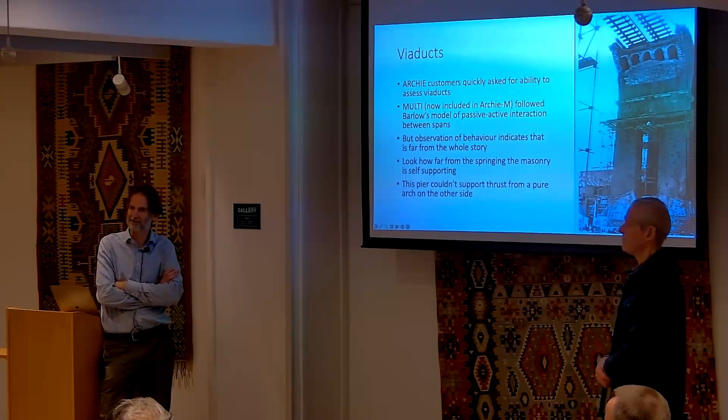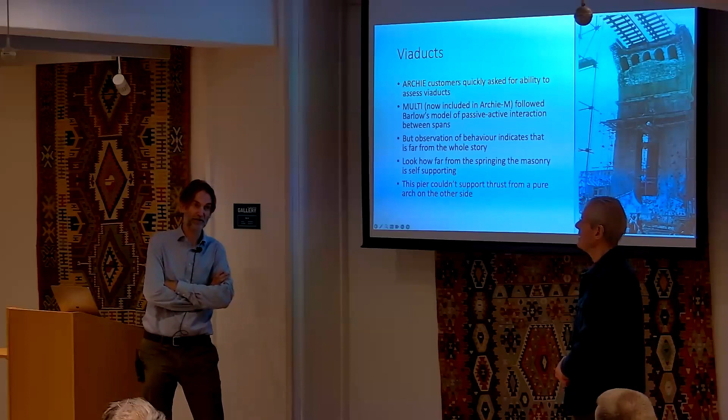That's your question - I said it was a general question. You see time and time again that losses from the intrados of an arch are patched up and stitched in without proper diagnosis, so that it looks all right. What it probably means is that next time a chunk falls out, it's going to be a bigger chunk - it may take longer to fall out. So it's really alarming in some places where over and over again the same patch gets put back in - it just gives it another chance to kill us.